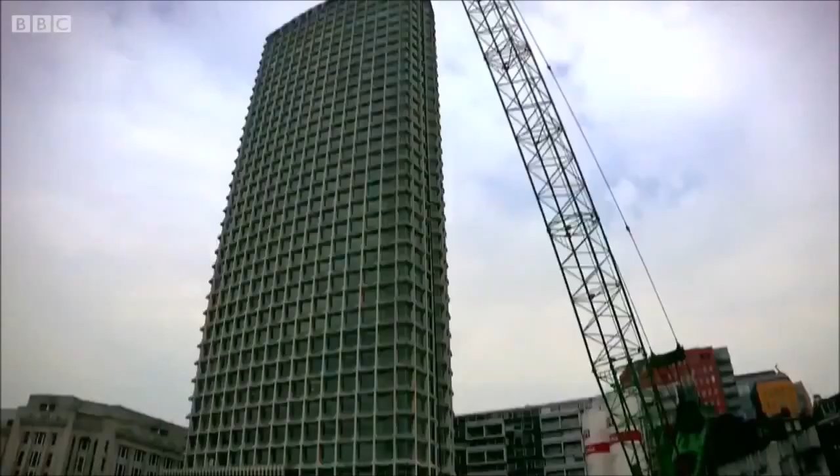Underneath the streets of London, an army of more than 10,000 workers is building the most ambitious railway in Britain for a generation: Crossrail.

Constructing Crossrail is like undertaking open heart surgery on a patient whilst that patient is awake. Costing almost £15 billion, constructing this 120-kilometre link is the biggest engineering project in Europe.

When we go through this gate, you'll see there's a very different world the other side of the fence. It's a strange, dark world. Not many people get to see it at this stage.

One of the greatest challenges: building 10 cavernous stations. It's a good place to put your worst enemy, isn't it?

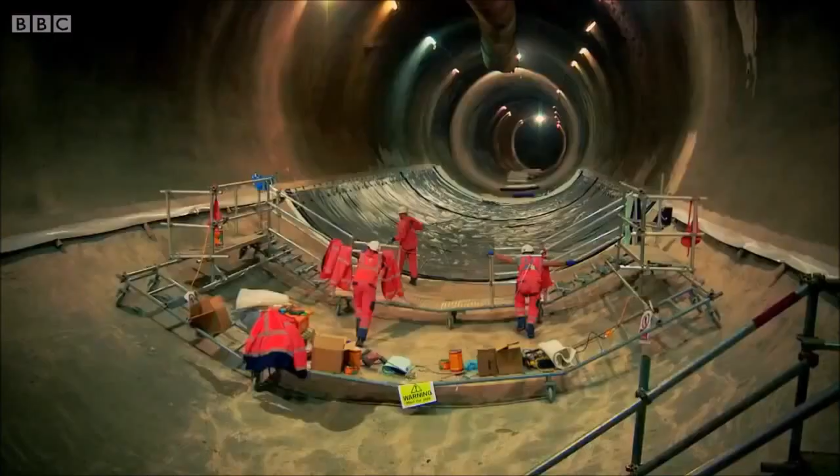It's difficult to appreciate the scale. Trains will carry 1,500 people. The station is designed to deal with 32,000 people at peak.

Working in the heart of the city, engineers are uncovering its past. We have come across some human remains within the shaft. It's a full skeleton at the minute.

And face a constant battle to keep London moving. This used to be a bowling green for the City of London. It was somewhat of an oasis beforehand in the middle of this area.

I plugged myself into my headphones to try and drown out some of the noise. This is the inside story of the epic endeavour to build London's new underground.

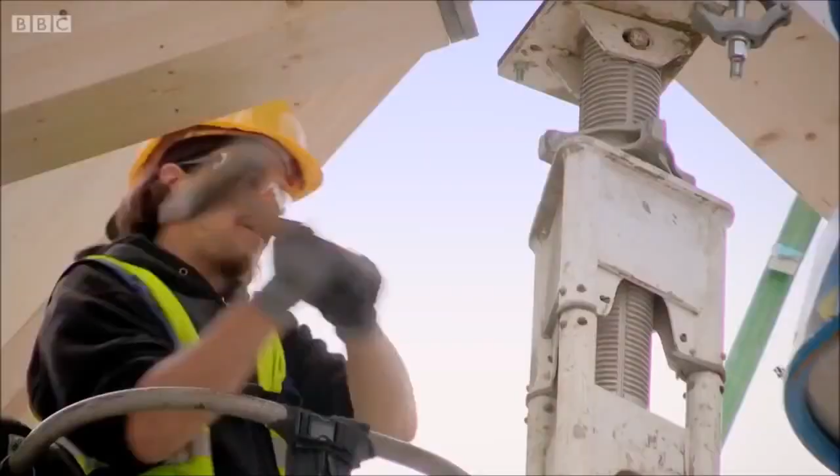London, Britain's business and financial heart. London has two banking districts: the historic Square Mile, and Canary Wharf, 5 kilometres to the east.

Crossrail's route will tie these hubs together, fueling economic growth. The new railway will pass right across London, cutting the commute from Heathrow Airport in the west into the city to 30 minutes. It will connect key mainline train stations with major shopping districts and the new city at Canary Wharf.

The 40 work sites needed to build this railway are bound to cause some disruption. I'm sure when it's up and running it'll be a marvellous thing, but I'm not sure full consideration has been given to the traffic.

It just makes more congestion, and it's the person in the cab that pays because they're sitting in traffic. London's a funny place, man. It can run smoothly and then it just gridlocks for no reason.

Crossrail's done a good share of that, good 60–70%. I'll probably never even use it. But Crossrail estimates that 200 million passengers a year will.

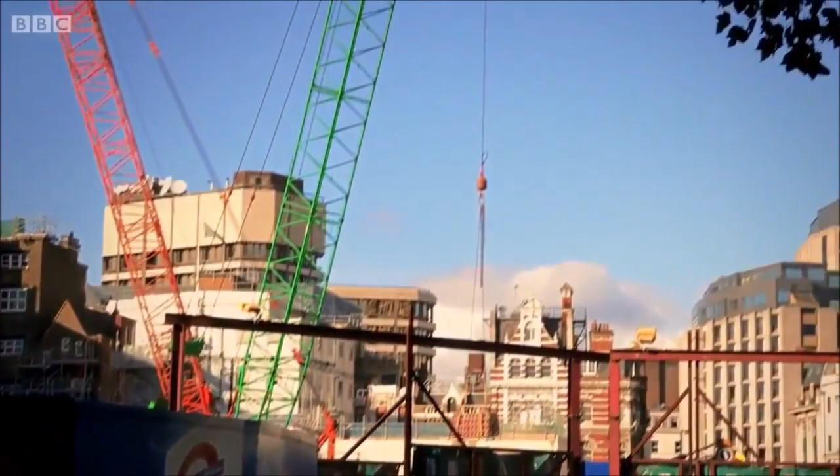One of the biggest tasks facing engineers is to construct the 10 new central stations. Canary Wharf will be the largest on the line. Leading a team of over 400 workers here is Michael Bryant.

What we're creating here is a passenger handling facility that will deal with between 5 and 10 people per second. I'm getting towards the end of my career now, and I can't really think of a better one to go out on than this, to be quite frank.

Employment here has quadrupled over the last decade. The new railway will help ease the pressure.

This is my third tour of duty, if you might say, at Canary Wharf. I was here on phase 1 when I did a lot of the early work on the logistics, and I was responsible for redesigning the DLR station and delivering that. And it really just instilled into me how important infrastructure and transport is to the future of development.

Canary Wharf station will be 250 metres long. And Michael's team is constructing it underwater, in a dock.

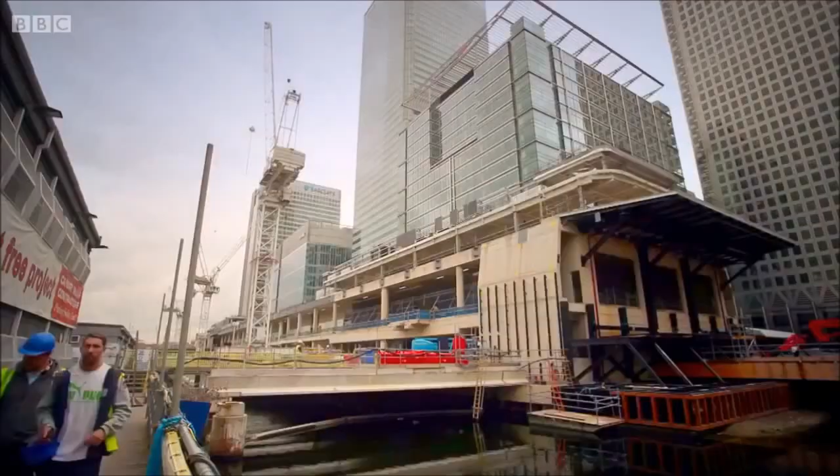They sank a vast watertight concrete box to form the station's walls. Concrete pillars anchor it into the dock bed. They drained out more than 40 Olympic swimming pools of water, then dug down to create 4 floors below water level and 2 floors above.

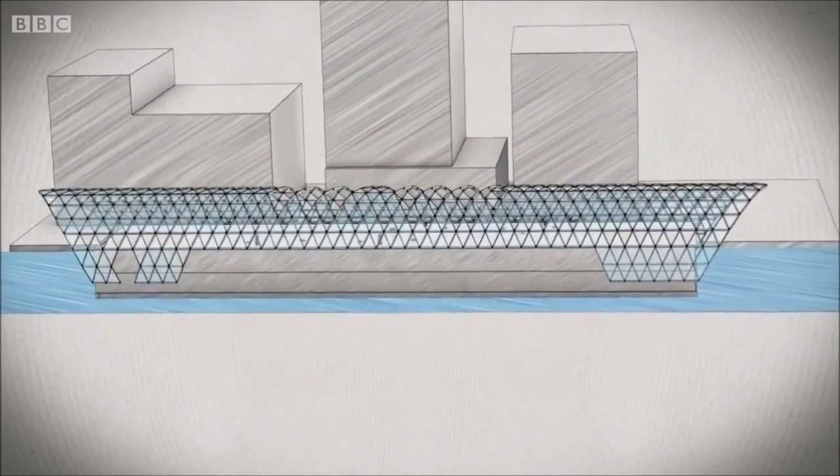Now the team face a series of challenges to transform this concrete box into a station. First, they must build the platforms, then install the escalators and ventilation system. Their toughest task: assemble its unique roof from 1,500 timber beams that will house a public garden open 24 hours a day.

The roof of this £500 million station has been designed by world-renowned architects Foster & Partners, famous for the city's Millennium Bridge and Gherkin.

Canary Wharf Group, who own this site, are investing £150 million to get the station they want. The brief to Foster, which was probably quite a brave way to go actually, was we want something that's totally different from everything else on the Canary Wharf. And I think we've got that, so they'll be very pleased.

The roof will be curving and arching up over like a curved apex. It'll be spectacular, like a giant conservatory or orangery. That's the feel that we've all been aiming for.

The 200-year-old West India docks were once thriving quaysides. These docks originally had the monopoly of handling ships and cargoes from the West Indies. Bananas for small boys, Saturday's picnic, or maybe the monkeys at the zoo. Fruit was offloaded here from the Canary Islands, giving the wharf its name.

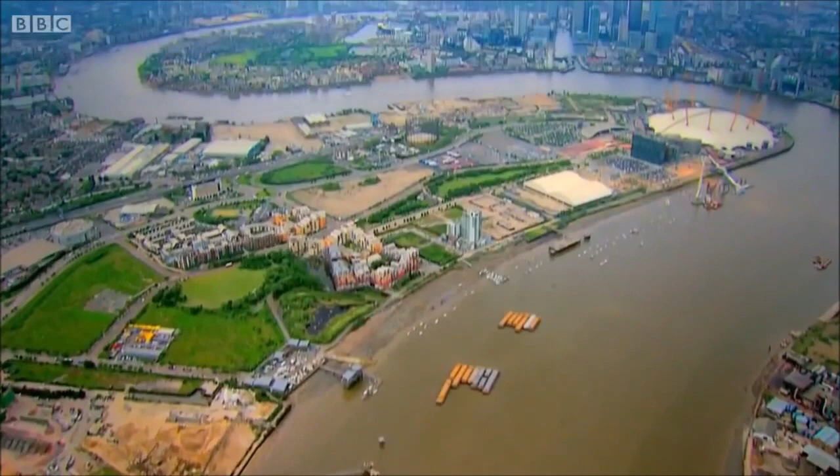But as ships grew in size and container ports took over, the docks fell into disuse. This vast area of land was reborn in the 1980s as the new home of the financial services industry. The site around Canary Wharf is still expanding fast today.

28 meters below water level lies the 21,000 cubic meter heart of this new structure. 4 years from now, 24 trains an hour will be pulling up at the platforms here. It's difficult to appreciate the scale of it. The trains will carry 1,500 people. The station is designed to deal with 32,000 people at peak.

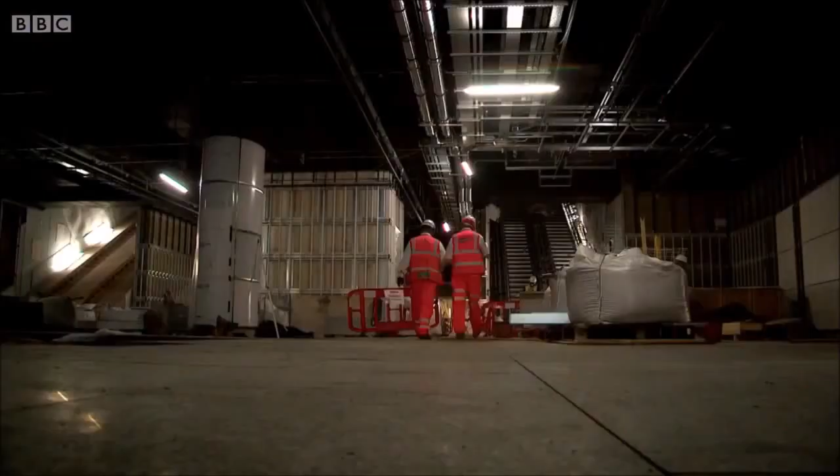And I've got to build a complete platform. That's my next objective.

Before Michael's team can start work on the platforms, they must shift 2 giant visitors. The machine you're standing next to is known as Elizabeth. She's a tunnel boring machine, 147 metres long, weighs about 1,000 tonnes. Whilst I'm very pleased to see Elizabeth here, and indeed her sister, who's over my left shoulder, called Victoria, I should be even more delighted when they've both gone, because what I want to do is get this space back to do my work.

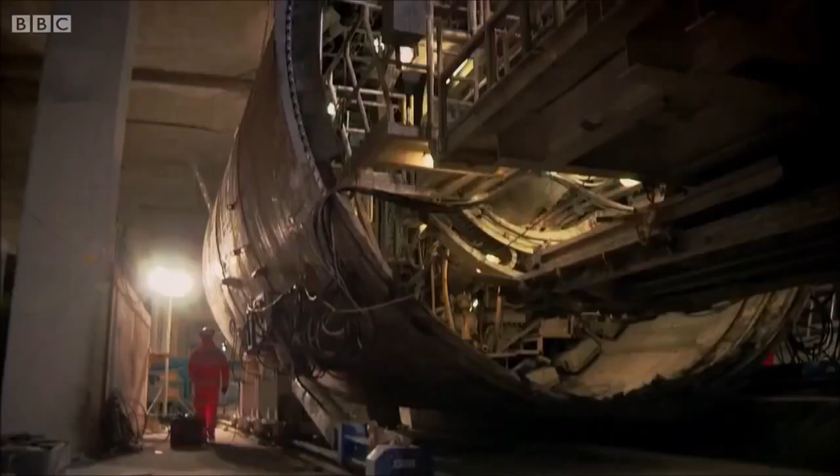The 2 massive digging machines have broken through into one end of Canary Wharf station. Now they need hauling through to the other end of the station box, so they can continue tunnelling towards central London.

Checking that their transit runs smoothly is second-generation tunneller Robert Birmingham. I'm one of many Birminghams underground, or have been underground, but my dad and my brother currently work on different sections of the project. The only reason why my brother and myself are in tunneling is because our fathers were.

These bad boys here is what I like to call God's roller skates. It's actually a lifting bracket that will lift the machine up using these jacks. There is then a propulsion ram at the back of the machine. There's no margin for error. As you can imagine, if one of these was to roll off these gantries, you're in a world of pain.

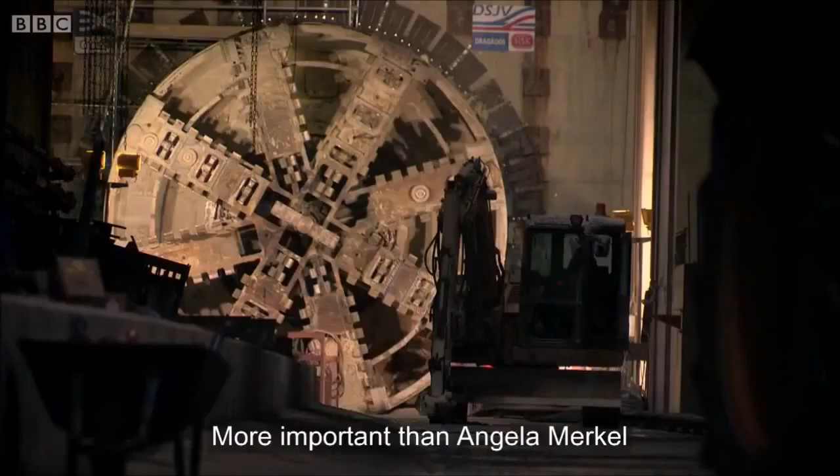In charge of driving the machine through the box. It's more important than Angela Merkel. I think so.

Yeah, it's one new system. Testing by doing. In the machine, it goes only this way. And when you drive too much, it falls down. That is a big problem.

Okay, boys, we're ready to go. Yeah. It's okay! Rock and roll. Yep.

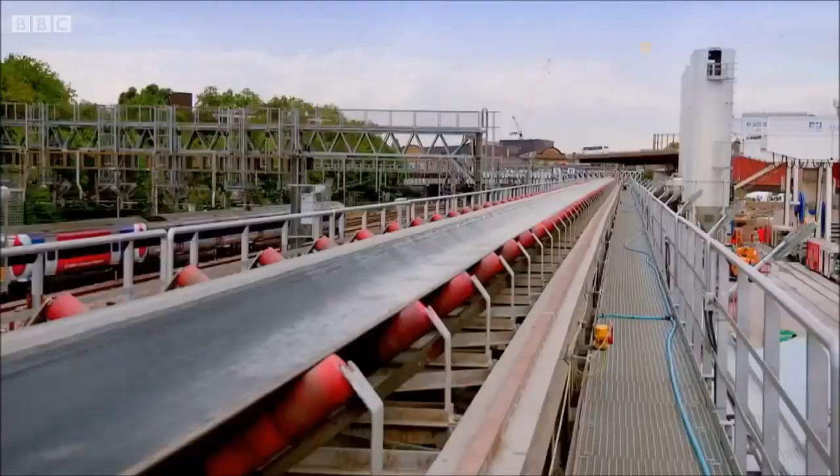As the jacks push the machine forward, the crew must extend the conveyor belt that runs out the rear. When digging, the 2-kilometre-long belt shuttles earth dug by the machine out of the tunnel. 4 meters.

We've come through the station here at Canary Wharf, and now we're breaking to the next section of tunnel, which will take us to Whitechapel, from Whitechapel to Liverpool Street, and from Liverpool Street we'll go on into Farringdon.

Three stops west, on the edge of London's historic Square Mile, engineers are already hard at work building a new £440 million station at Farringdon. Built from steel and stone, Farringdon Station will connect the Tube, Thameslink and Crossrail together. 150,000 people will use it every day, making it one of Britain's busiest stations.

Historic buildings surround this area. The Charterhouse is a Tudor mansion built on the site of a 14th century monastery. Engineers are digging deep shafts near these listed buildings to pump grout beneath the foundations to stop them sinking as they build Farringdon Station underneath.

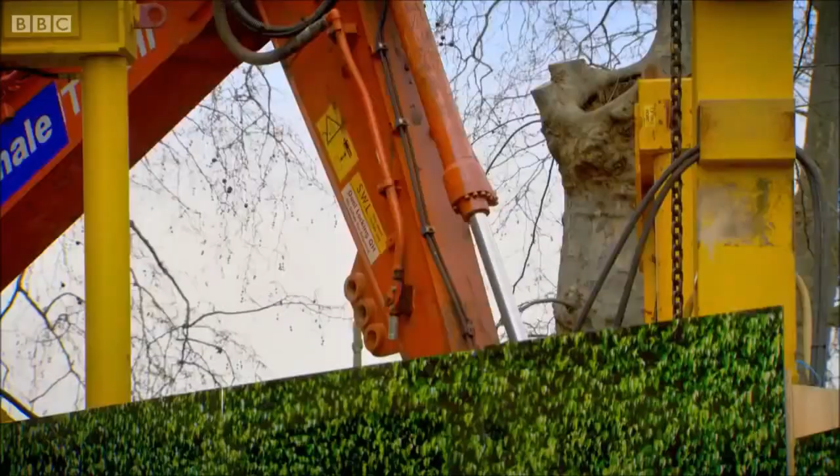The excavations have led to a grim discovery. We have come across some human remains within the shaft. We started off with a skull and then found a shoulder section, and it's a full skeleton at the minute. That's what we've uncovered so far. I saw part of a skull come up. So I got in, got my trowel out, had a look around, and I found one.

And then there were two more aligned east-west, which is what we'd expect from a medieval inhumation. We can only really tell that they're adult inhumations. In terms of what sex they are, it's very difficult to tell when you're digging them up. The skull is really fragile. It almost crumbles the second your trowel gets anywhere near it. Some sites have up to 22 extra weeks built into their schedule to accommodate archaeological investigations like this.

Crossrail's in-house archaeologist, Jay, has just 4 weeks before engineering work must resume here. It's exciting - this is one of the first times within this immediate area that we've actually found several skeletons together.

We know from historic maps and other historic records that within this area was one of the emergency burial grounds set out in the mid-14th century. But it's never been constructed on, it's never been built on, so it's very rare that there's an opportunity to really look at the archaeology of this site in detail.

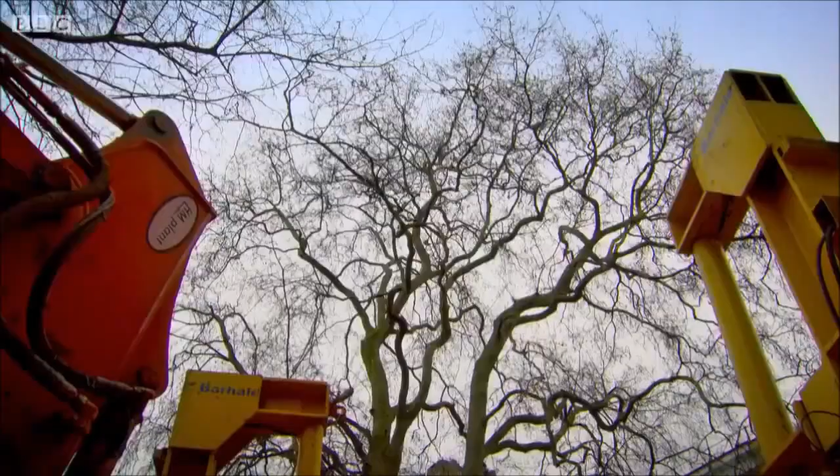Detailed forensic analysis will reveal if Jay and the team have found London's long-lost plague pit.

Three stops back east at Canary Wharf, construction work is beginning on the most complex part of Crossrail station here, its roof. This ambitious 1,000-ton canopy will be built from 1,500 timber beams, joined together using 860 steel connectors. The wooden frame will be covered by air-filled plastic cushions, enclosing the rooftop garden.

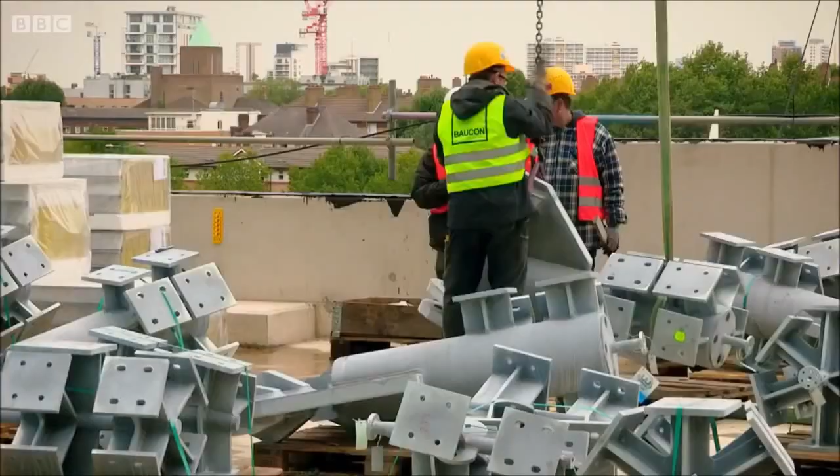Overseeing the German specialists who have 6 months to assemble this giant 3D jigsaw is Irishman Phil Duffy. One or two of our lads don't speak much English, so it helps a little bit to be able to speak a small bit.

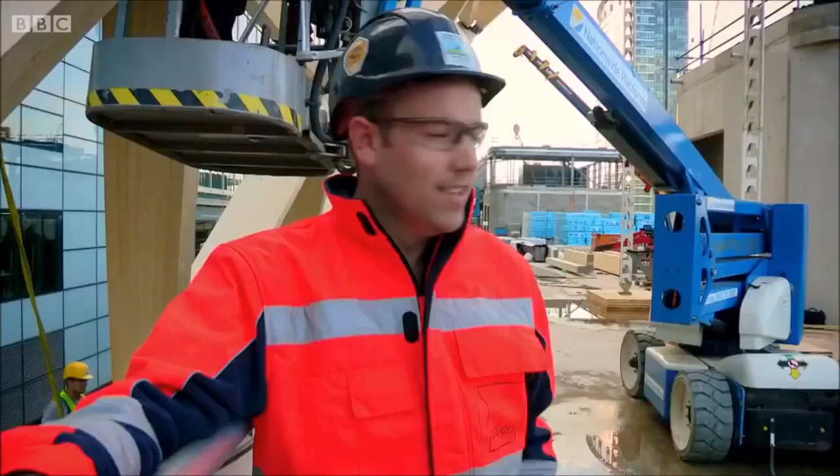Phil's not the only Duffy on the job. My dad's up fitting one of the timber beams at the moment. Slave driver, so I am. He gets the brunt of it. Yeah, he always had an interest in following in his footsteps, I suppose.

Phil's first milestone: assemble the roof's very first arch. If we don't have these in the exact right position, the timber elements won't fit.

Tiny bit down - everything has to be within the millimetre. This is like the keystone. The big crane will lift this in, and hopefully then it will slot into the exact right position. If this aligns up, the whole structure will follow through. So this will be one of the most critical lifts of the whole thing.

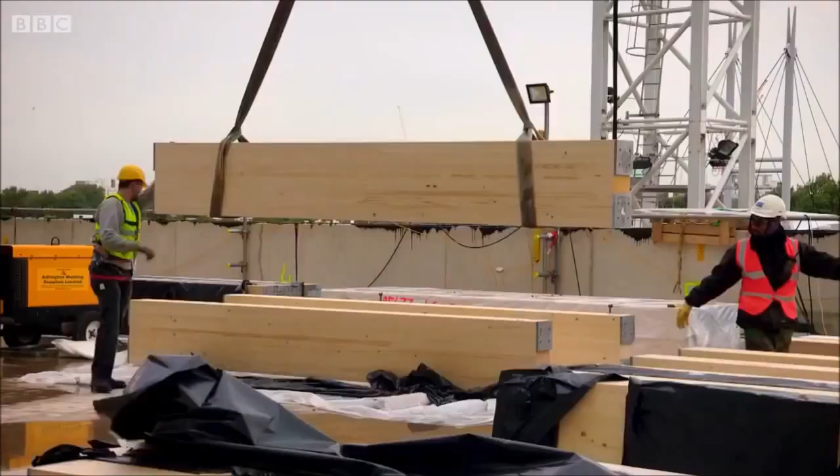Prefabricating a structure away from site and then assembling it as a kit saves time and money. It's a technique that's been used to startling effect in the past.

To house the Great Exhibition of 1851 in London's Hyde Park, engineers designed the Crystal Palace to be built this way. More than 1,000 cast iron beams and 300,000 sheets of glass were cut precisely to size in Birmingham, then transported to the site. The hall was big enough to house 6 cathedrals the size of St. Paul's, and it took just 7 months to erect.

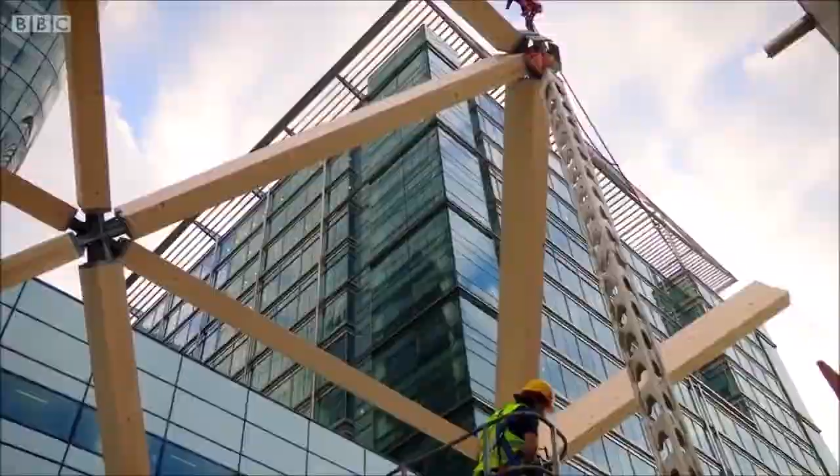Each batch of wooden beams for Canary Wharf station roof is prefabricated at this factory in Austria.

No, I'm not a timber geek, I'm just a regular guy. In charge is project manager Daniel Niebeler. I always wanted to build timber houses when I was a kid. So I started studying timber engineering and ended up as a project engineer for big-scale glulam projects in the UK.

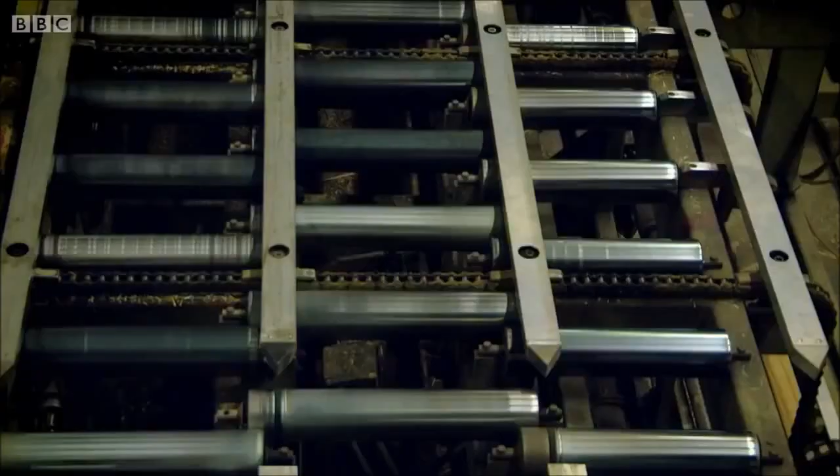Glulam is short for glue-laminated timber. The beams are formed of thousands of planks, glued together and cut to size. We get the spruce planks delivered from the sawmill and we put those into a kiln, and then we get dried down planks into our production line.

Workers scan each plank for imperfections that could create weak spots and remove those not up to scratch before gluing. Glue will be applied onto several planks, and then all the necessary planks required for one glulam beam will be put into a big press where they will be compressed till the resin has cured. It's immensely strong - the strength to weight ratio is bigger than with concrete.

Once dry, they cut and sand the beams down to size. This is actually already a proper glulam beam at the moment - it just has to be made good looking.

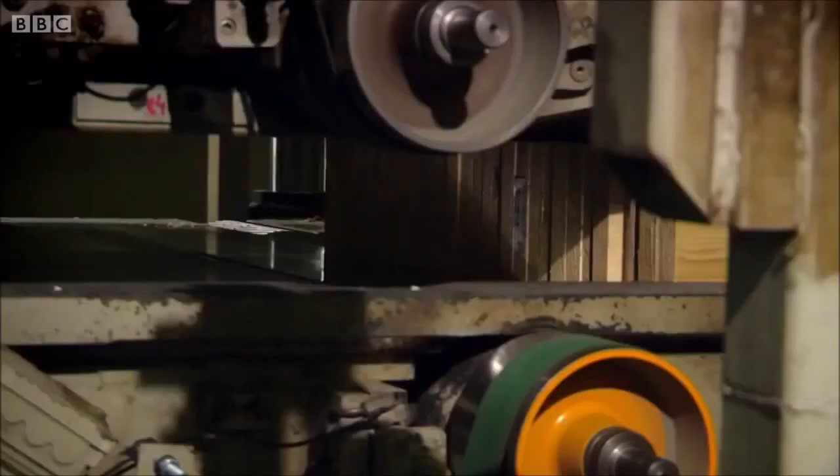Now the beams start to look really sexy. Oh yeah, we've got wood. Well, that's a top view of our Crossrail station roof. We could actually play Twister.

Applying those steel parts onto the timber beams is the final step. All that's left afterwards is wrapping them up and put them on the truck over to London.

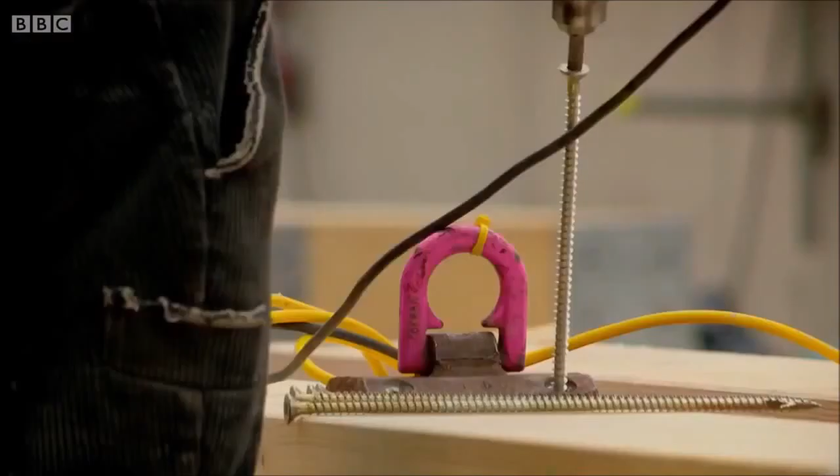You got a knife on that little Swiss thing of yours?

The roof's first arch needs a keystone, a 2-ton timber unit that will join the structure together. We're just about to put the centre section in place using the tower crane. We'll get everybody else out of the way and hopefully it'll go well.

As you slew round, mate, that should stay same orientation. Heads up, heads up.

Nice and steady, inches at a time, please, mate. Nice and steady, come down on your wire.

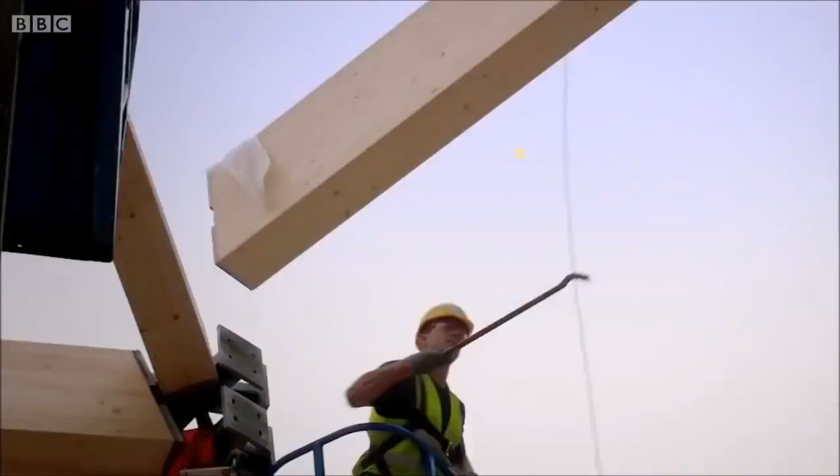The keystone is in position, but it's not a perfect fit. Just trying to locate the bolts on each corner. It's literally millimetres out. If we have an issue here with one of these timber structures, it exaggerates as you go along the building and our connections won't go in correctly. For alignment, they have to be perfect within maybe 5 mil.

Hit it properly, Robin. You can't beat the sledgehammer at the end of the day.

Yeah, that's it. Fairly chuffed, yeah.

Beautiful, beautiful. I like the way you work it. Oh yeah, I think I should have been a photographer.

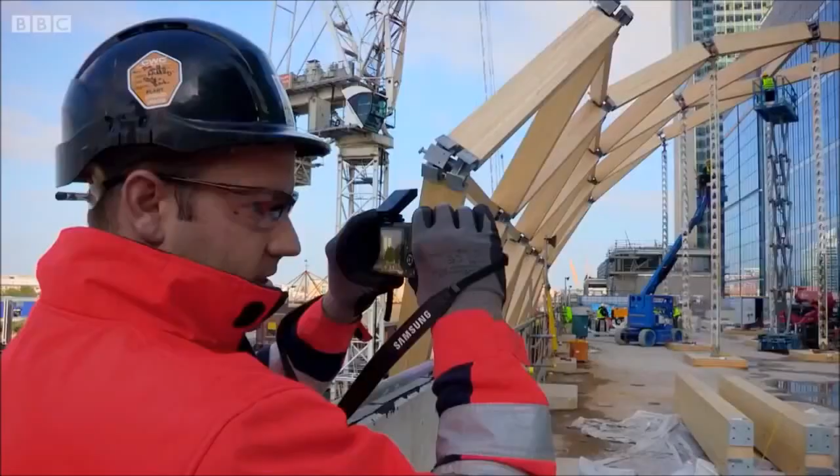What do you think? If you stand back and look at it, you can see the whole arch from one side to the other side now, which is perfect. This is a massive structure, and when it goes to plan, you can't be happier. Looking more than good, looking brilliant.

Okay. First milestone complete. 1,400 pieces of the jigsaw to go.

28 metres below dock level, Crossrail's tunnelling machines have left the station's giant box. Now contractors can get to work fitting it out. First they must build the 240-metre-long platforms. Then install the building's ventilation system and 9 escalators that will shuttle passengers down from the ticket hall to the platform level.

Heading up the team is construction manager James Goonan. I've never built a train station before, never mind one in a dock underwater.

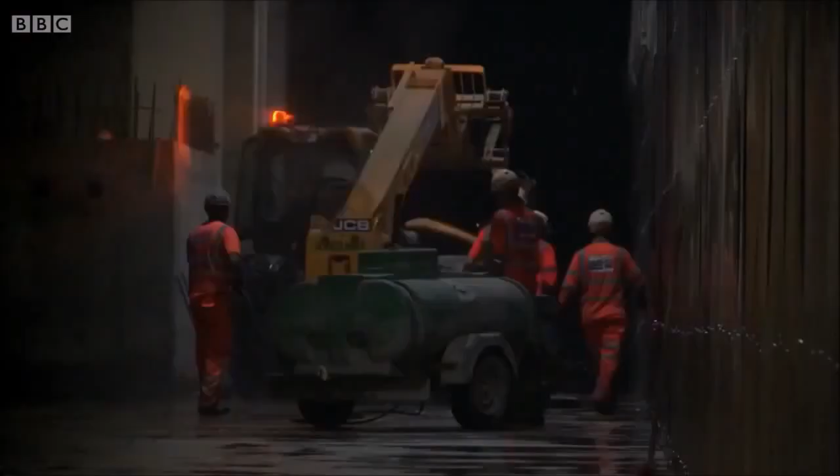One of the big issues is actually getting our materials down here. We've got what we call a mole hole, which is a hole up there which goes up to the surface level. Without full access to the mole hole, we can't carry out any works down at this level. There's no other way to get materials down other than the mole hole.

James must thread 580 precast concrete slabs down through this mole hole to the basement to assemble the platforms. It won't be easy. He's just following us with it. Where's he going?

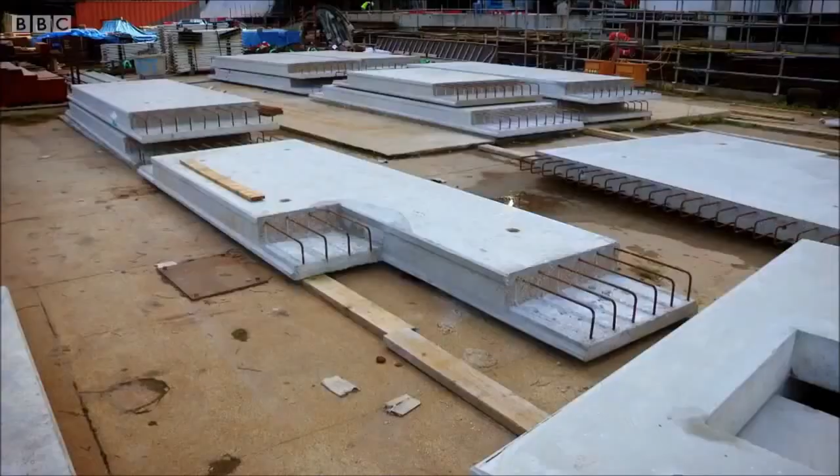So how many more panels you got to go in before the escalators? There's basically 150 left to go in from the east. Yeah, no, it's already looking good down there. It's taking shape.

Yeah, the precast is coming down as I am talking to you, Adam. The gantry crane's going 10 hours a day, 6 days a week, and it's the lifeblood of getting the platform built. All right, nice 4 please, Rocky.

James has just 6 weeks to get the platforms in place before the escalators arrive. The mole hole's the only way to get the escalators down due to the size and the weight of them. It'd be nice to have a bigger hole.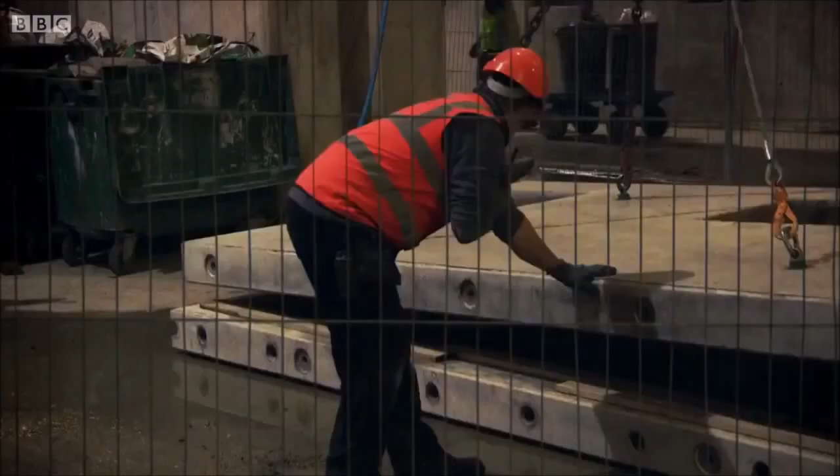Two stops west of Canary Wharf, engineers are constructing Crossrail's new station at Liverpool Street. The eastern ticket hall will sit 40 metres underground. It's one of many sites across London offering a portal into the city's past for Crossrail's lead archaeologist, J. Carver.

We're just outside the Roman and medieval city wall. The historical significance of this site is it is the site of the burial ground of St. Bethlehem Hospital, which from the 1600s through to about 1800 was located just nearby in Finsbury Circus.

Nicknamed Bedlam, Bethlehem Hospital had treated mental illness since the 13th century. Have you got any idea how many individuals we've taken out in this small hole so far? More than 50.

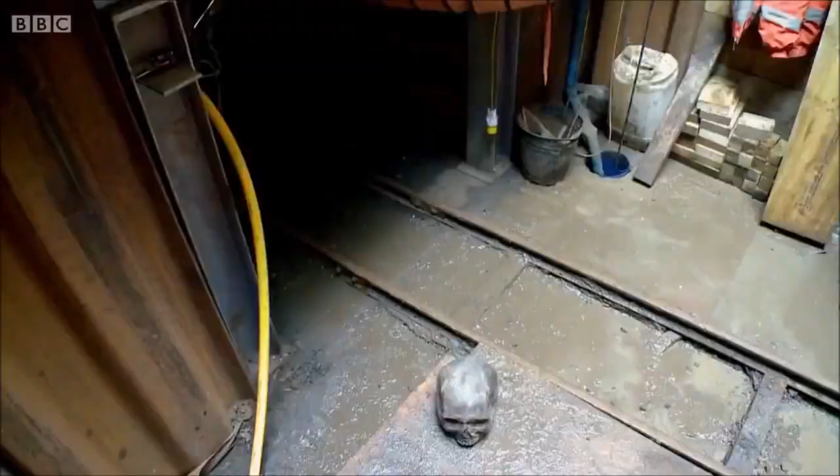Because the burial ground, being a post-medieval site, is very likely to be overlying earlier levels from the medieval and possibly even Roman periods as well. Digging deeper, the team uncover Roman skulls and pottery, washed down to this site by an ancient river, the Walbrook.

We've got very many sites coming up where we'll be doing this kind of investigations, so we'll be undertaking works all across the job for every Crossrail site.

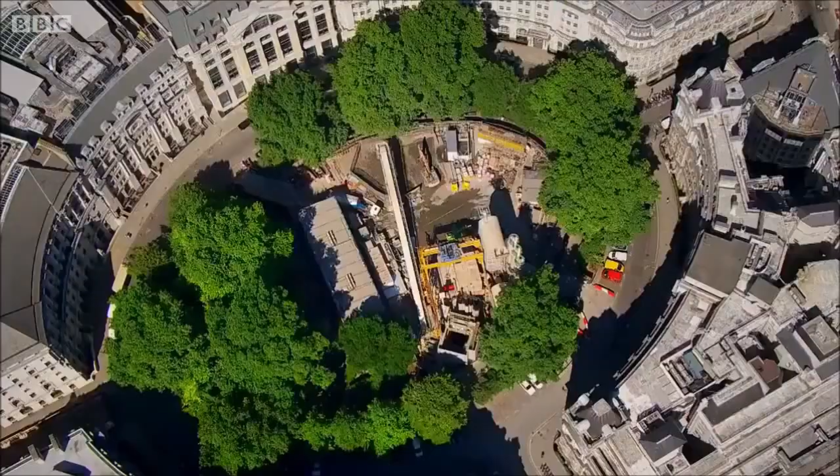Liverpool Street Station will be one of several new Crossrail stations serving London's traditional banking district. Space here is at a premium. To build the station, engineers had no option but to commandeer London's oldest park, dating back to 1606, Finsbury Circus.

They will need this area until 2018 for access down to the station worksite underground. A decision that's not proved popular with city workers. It's really detrimental. It has an adverse effect on environment, and because we enjoy coming here to eat here, people come to work, they want to have a healthy life. It was somewhat of an oasis beforehand in the middle of this area, but as you can hear, it's not really having that effect anymore.

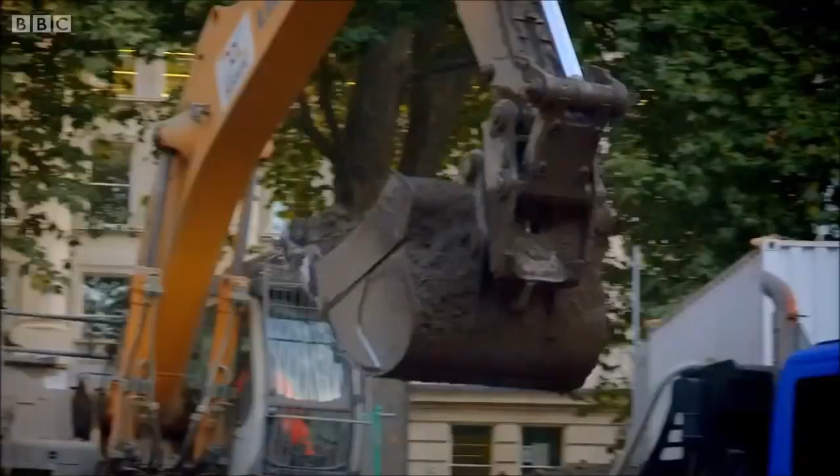It's annoying. It's only 5 years. In the grand scheme of things, it's not the end of the world, so.

Finsbury Circus is the subterranean gateway for construction manager Jules Boyd and his crew. This used to be a bowling green for the City of London, and we're going to put it back like that when we're finished. A lot of people have likened this to an anthill, where you've got a very small surface, sort of a lot of busyness, but underneath it's a whole network of tunnels.

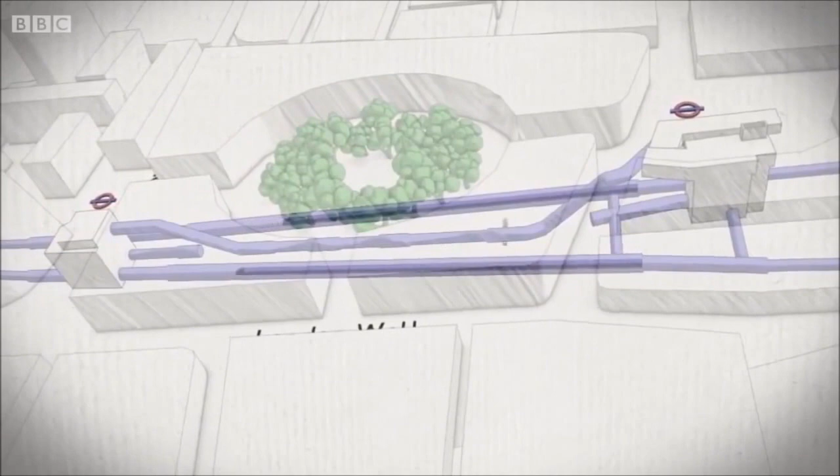Underneath the city, Crossrail is carving out ticket halls and walkways to create the new station. Longer than 2 football pitches, the platforms connect Moorgate Tube Station to the existing Liverpool Street Station in the east. Over a kilometre of winding passageways need burrowing out to link the platforms together.

It's a strange, dark world. Not many people get to see it at this stage here. A little bit more work to do to make it passenger friendly, I must admit. It will look very different from this, I assure you. So, and hopefully it will be quieter.

Jules's team use excavators to enlarge a pilot tunnel, creating vast underground spaces that will become the platforms. Once dug out, they spray the clay walls with special concrete, called shotcrete. It contains steel fibres that make it extra tough.

You can see the fibres here, which are the reinforcing thing. Don't put your hand on there, you'll get like a porcupine.

The spray gun fires the concrete out of the hose at over 100 metres per second, turning the steel fibres into bullets. You wouldn't want to be hit by it anyway. Steel fibres protruding from you.

Jules's second big city station build is one stop east at Whitechapel. I come down here quite often. You find all sorts of fruit and veg that you've never seen before. Most people walk along here and they see just the blue hoarding and then some strange buildings up here. And when we go through this gate, you'll see that it's a very different world the other side of the fence.

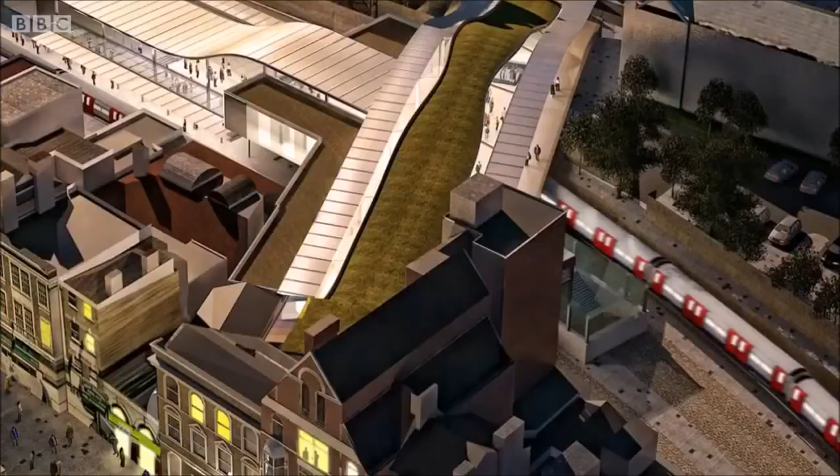Stretching out beneath the ground at Whitechapel will be 640 metres of platforms.

Today, Jules is preparing for a major milestone. The arrival of a tunnel boring machine that will break through into the station, connecting Whitechapel to the rest of the network. This is where the TBM is heading towards us right now.

This is the bit we have to have done. It has to be right. So there is not a chance of a big slab of shotcrete head wall falling into the tunnel or anything dramatic.

The end of Whitechapel's platform tunnel is rounded rather than flat. If the tunnelling machine breaks through this thin wall, it could damage the platform roof, causing up to 1 metre of cracking. To prevent this, the team has built a solid concrete plug.

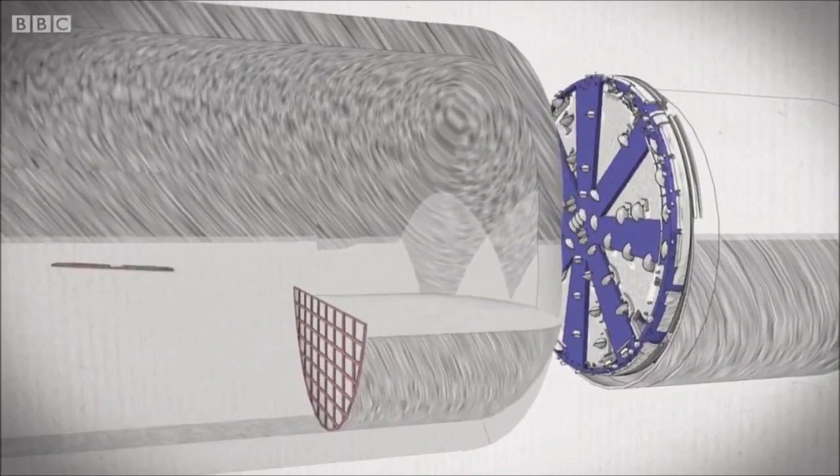This reinforces the station walls, but tougher than London clay may make the final drive into the platform harder going for the tunnellers.

It's quite exciting. It's actually coming to fruition now. And then we'll hit the wall.

There's communication so they can speak directly with the TBM driver from this tunnel. In the unlikely event that is coming through over here, we can say stop, for example.

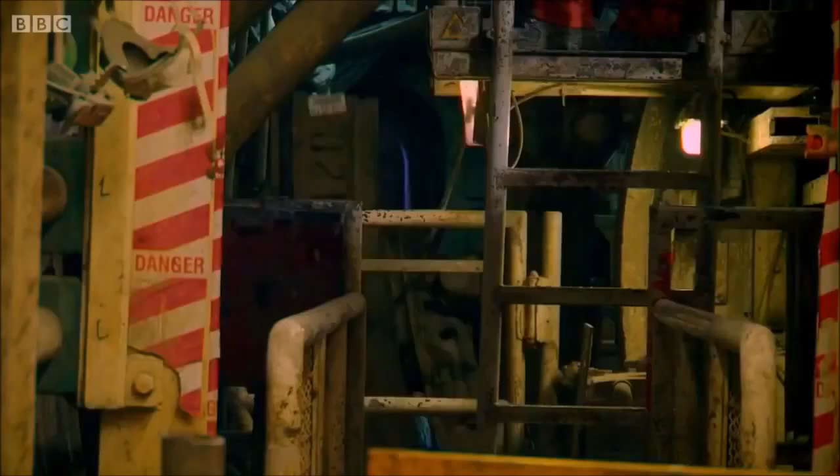On the other side of the wall, inside the tunnel boring machine, Dave Shepherd and Paul Haycroft drive the cutter head into the concrete plug.

You can go up to 30 on the head, it's not liking being in complete firm concrete. We've probably got about 4 metres plus of this material to cut through before we appear in the station.

The heat from cutting through the tough concrete is beginning to cause serious problems. The crew pump extra water into the cutter head to prevent overheating.

But this is creating a troublesome concrete soup. I see on the belt there's a lot of slop going up the TBM belt. So for all the modern technology, you'll see here that occasionally we have to resort to traditional hand methods.

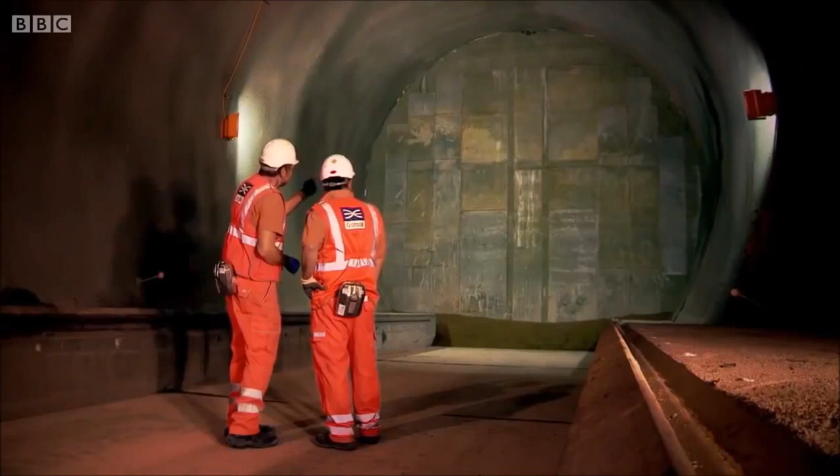That's always quite exciting. Everyone likes a TBM breakthrough, don't they? If it's in the right place. I think these guys back here, the surveyors, are looking a little bit nervous. Well, we should have had a little sweepstake before this. We could have all put our X's on. Like spinning the... spinning the dog or spot the ball.

I swear the noise is coming from the right-hand side rather than in the middle. But...

We can't stand much more of this heat that the concrete's generating. While the tunnelling machine battles the heat, all Jules and his team can do is wait.

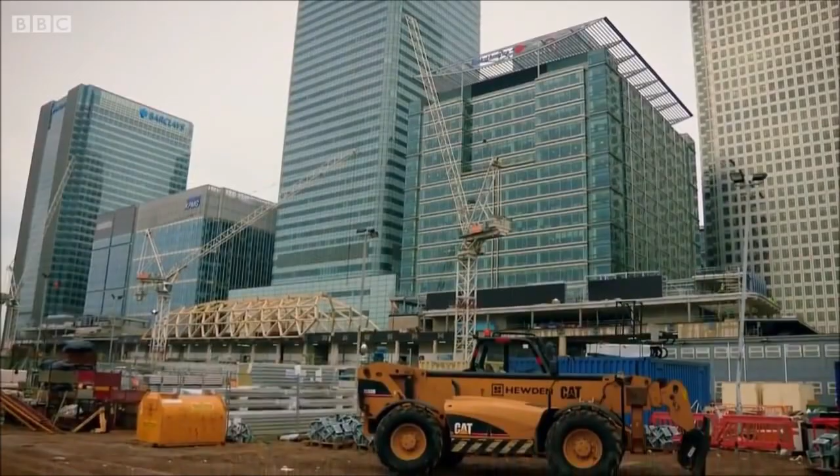One stop back east at Canary Wharf, the new station's roof is slowly taking shape. When complete, the entire building will be longer than its neighbour, 1 Canada Square, laid on its side.

The sheer scale of the station creates unique problems for its engineers. During the daytime, as the sun heats the building, it will try to expand, and at night it will try to contract. If the building was a single structure, the movements at the ends would be so large that it would actually try to tear itself to pieces. So we've split it into 3 sections, meaning they can move relative to each other without causing problems. They are kind of alive, yeah, it's quite a living, breathing thing.

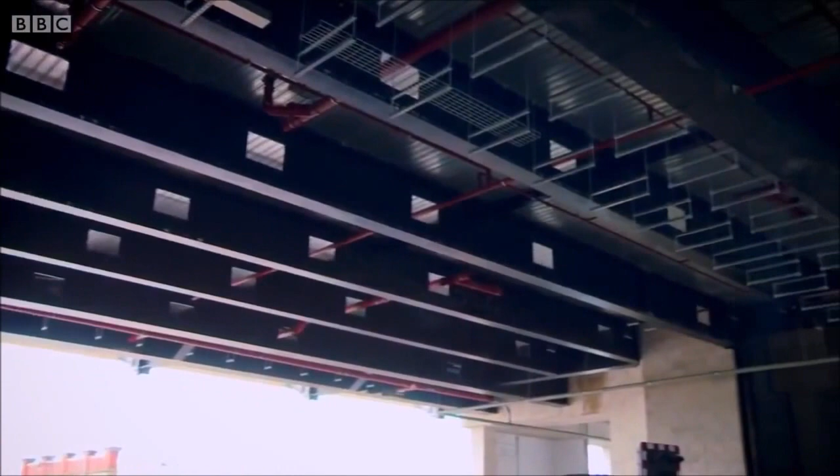Most of the station is built from reinforced concrete, except for this stretch at the east end of the structure, which is made from steel and passes over a road. The steelwork also needs to take the weight of the gardens above, which causes problems. It still behaves very differently to concrete. It could be a problem - something that has to be allowed for in the design of the roof, because otherwise the roof isn't going to behave as it's designed.

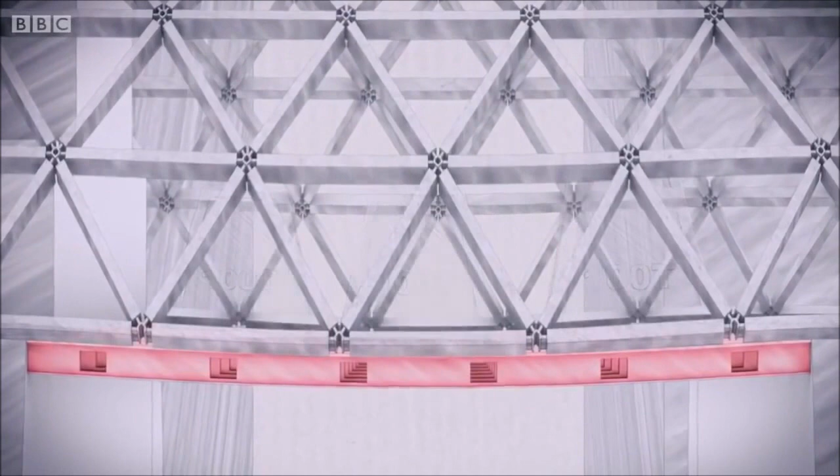This steel section will be more flexible than the concrete either side. If the team built the roof across the steel then added the soil and trees afterwards, the extra weight could cause the steel to sag, pulling the timber roof down. So before they build across this section, they must pre-stress it, loading it with 300 tons to simulate the weight of the gardens. Only then can they build the roof. When they remove the weight, the steel will temporarily spring back up until they landscape this area, which will push the steel back down, leaving the roofline perfectly level.

We needed 300 tons. That's quite a lot of weight to add, but it needed to be done in a way that we could take it off easily afterwards. So we came up with the idea of using paddling pools, and it looked kind of cool having a load of swimming pools on top of the roof. It went on in August, so it looked quite inviting at the time. Now it's November, it's not quite so nice. You can see the water here, it's quite manky.

Now the steelwork is preloaded with the swimming pools, it's safe to build the roof on top of it. You're now pretty certain that that will fit in with all the glulam you've got?

With the pools in place, Phil's crew can continue piecing together the roof across the steel section of the station. We have 5 mil tolerance there with it. I'll adjust it and then you come back and resurvey it. Okay, make sure it's all right.

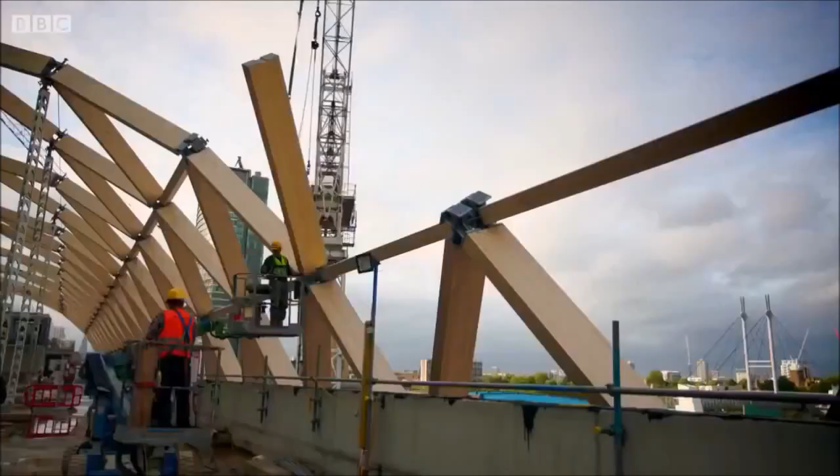With another 200 pieces of the jigsaw locked together, they can pull the plug on the pools. The floor is going to lift very slightly, and it's going to take the roof up with it. Then when we add the park landscape on later, it will push it back down, and the roof won't have any extra stress in it.

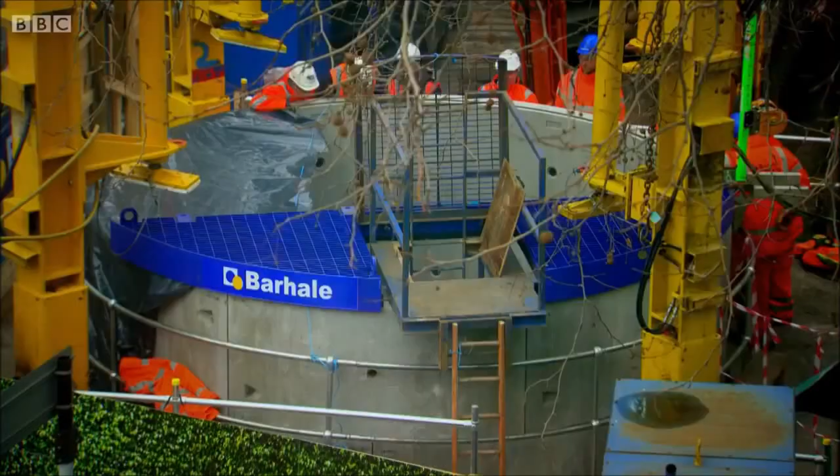At the new Farringdon station site, Jay Carver's team of archaeologists have uncovered 25 skeletons. They think this was the site of an emergency burial ground for victims of the Black Death, and are waiting for confirmation that they found London's long-lost plague pit.

This burial ground has long been referenced in historical documents. For 600 years it's been talked about, but it's never been found. We're hoping to find out some crucial questions about the skeletons we found - precisely what date they are, and can they be linked to the 14th century outbreak of Black Death?

Jay sent the skeletons to bone expert Don Walker for forensic analysis. So this is one of our individuals from Charterhouse Square. Yeah, this is one of the ones we've been working on, one of the 25. You'll see nothing on the skeleton of a Black Death victim that reflects that disease. Right, so we have to look much closer, microscopic. Yes, so what we do is sample the teeth - they're a microbacterial time capsule. The plague's DNA becomes trapped in the roots.

We sent off a tooth to have a look. They sequenced the DNA and compared it to various diseases, including Yersinia pestis, the plague, and they found some matches. It's pretty incontrovertible, really, that that's what we're looking at. The evidence seems to fit with that, certainly. The chances are, if they were exposed to it, they probably developed symptoms and probably died. We can't be absolutely sure, but we know they were exposed to it.

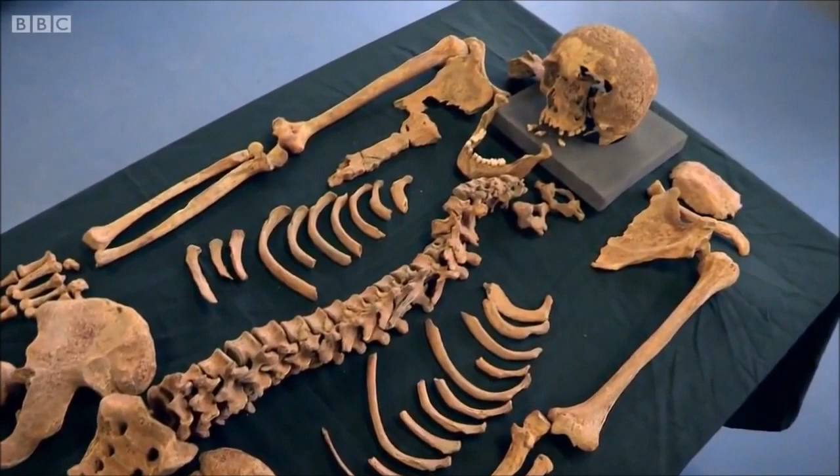This individual was probable male. We also want to look at the age, to see at what age they died. Once you're grown, it's to do with wear and tear - things we would look at would be the joint surfaces. We think this person probably died between the age of 26 and 35.

We have been doing research to look at things like strontium, carbon and nitrogen, not only to see where they may have come from, but what their diet may have been. What we found is there seems to be a mixture of people who were born in London and people who were born elsewhere. London was a mixture of people born there and people who migrated in, like today. By the 14th century, there was massive trade and exchange all over Europe and further afield. The Black Death made its way by those processes. We've got a huge amount to write up and publish now.

Jay and the archaeologists have cracked the mystery of the Farringdon bodies. We finally found evidence for this emergency burial ground, set out in 1348, more than 600 years ago. We've got an incredibly clear picture now of these individuals and how they ended up in Charterhouse Square, and I think it's a highly significant find.

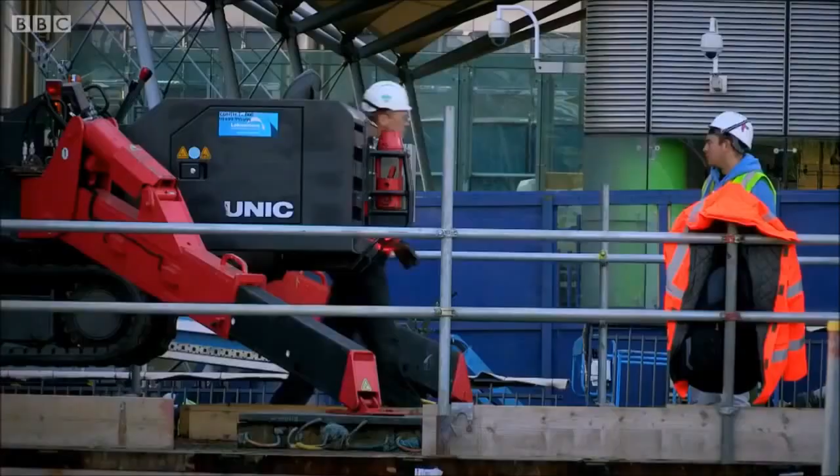Three stops east, back at the new Canary Wharf station, with the platforms almost complete, workers are installing the ventilation system. The western elevation has 3 gaping holes, behind which 3 fans will sit. Bespoke stainless steel covers will hide this backroom machinery from view. The job of installing them falls to snappy dresser Neil Dutton.

Yeah, I've got this bit of a thing about shirts. I get them custom made. What can I say? I've got a big neck and a little body. I'm probably the best dressed construction guy on site.

We have been employed to clad the whole external section of this with a stainless steel surround, to get to a finished product on the outside, making it look sexy and pretty.

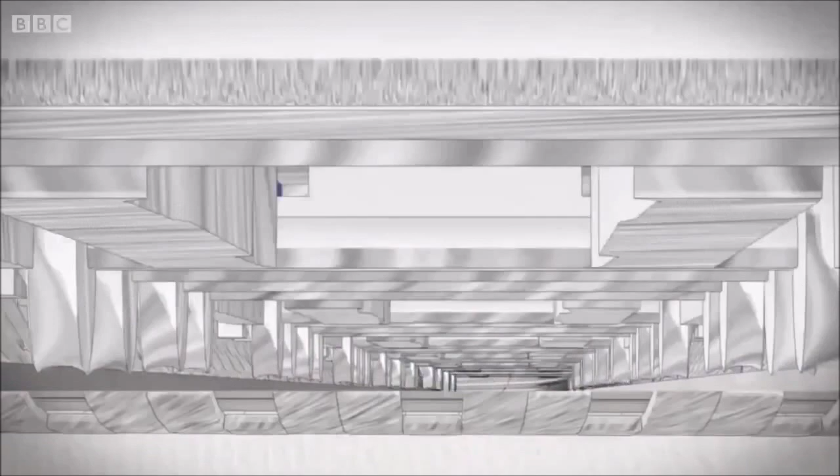The station's ventilation system is critical to its operation. Crossrail is spending £26 million on platform edge doors to separate passengers from trains and stop litter being sucked onto the tracks. But the doors cause a problem: a train rushing through a tunnel creates an almost perfect seal, forcing air in front of it. As trains pull into Canary Wharf station, pressure will build and needs releasing to avoid damaging the platform doors. So a network of ventilation shafts not only draws away brake heat, but also allows the air to escape. 3 giant fans at each end of the platform will help pull the excess air out to surface level. This should relieve the pressure and protect the platforms as trains arrive.

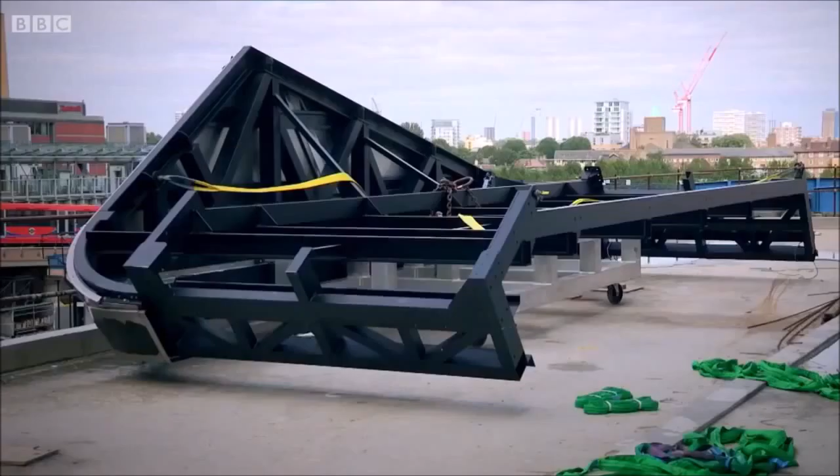Neil's team must crane the vent covers down from the roof, then winch them up into position.

Okay, and we're not going to leave any rough edges on this, are we? I don't want any damage or any scratches to that thing. That's the only thing - no, they cost quite a lot of money. I think each frame, with the stainless steel, is probably 75,000 a piece. So we've never done anything like this before, it's new to us.

Gentlemen, this is a very important lift today. I don't care about time, I care about precision and safety. So let's just make sure we do this right. Before we do, I need signatures on the back of this, please. The crew must sign up to confirm they understand the lift plan. Have you got anyone taller than you? There's nothing better than seeing you bent over.

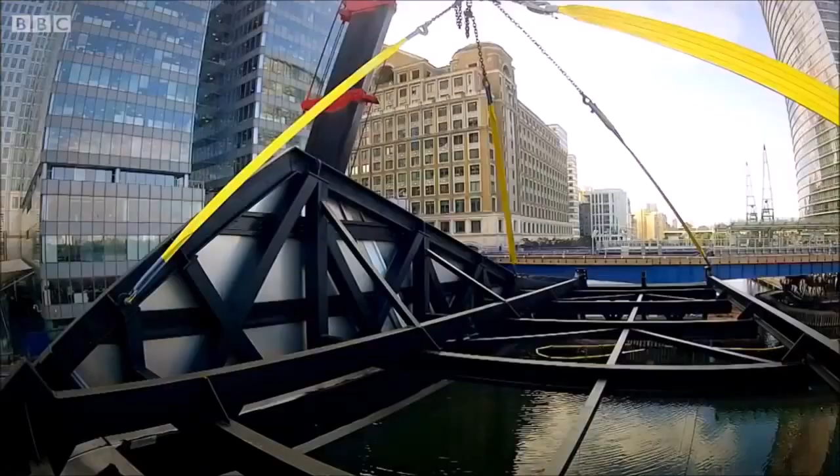Yeah, we're good. This is absolutely awesome. Guys, we need to get hold of those lines. Whoa, whoa, whoa, whoa. There was a little tight spot there, as you saw - that was the most concerning part. That's it, pull his ass end in over there.

We're good, that's the easy part. With the first covers down, they can hoist them into position. A winch, pulley and crane hold the steel in place.

We see them as six halves - they're actually 3 units, but they're 6 halves. It does look quite spectacular. When you actually see them all completed, it's going to be quite iconic when people are actually walking by.

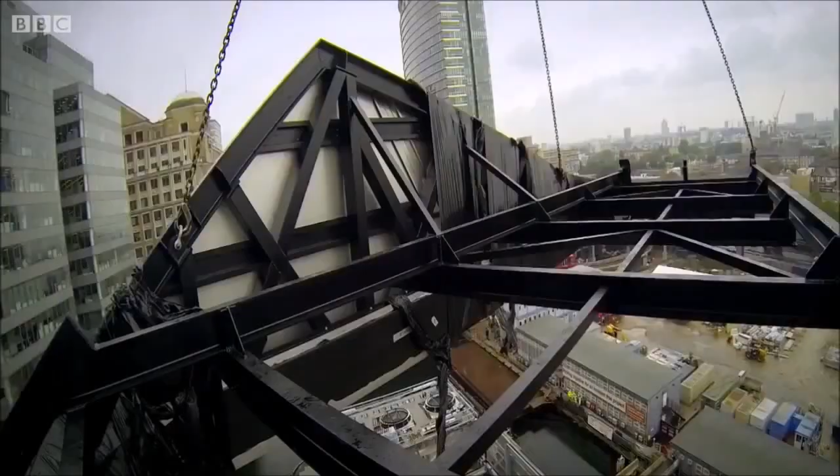Get down to that. The gap to squeeze in the final vent cover is tight. Right, when that thing's in there, it's going to look bang on, you know?

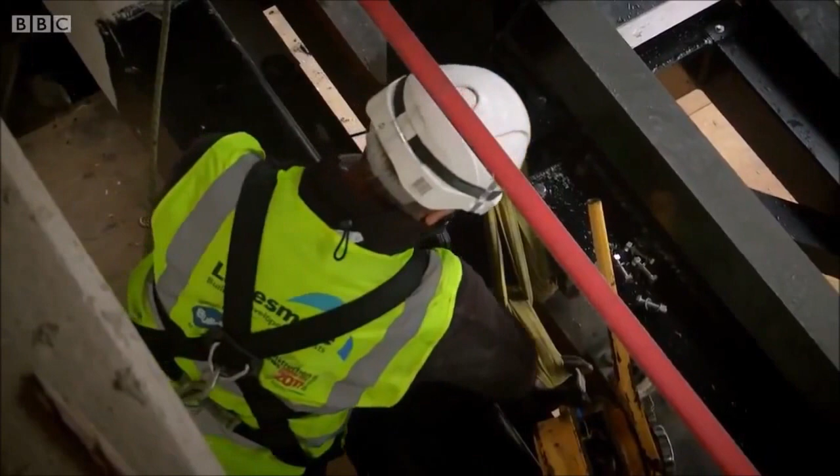Disaster already - Milo, you never checked it, did you? The holes in the bottom drilled too small, didn't they? Ken, what's going on, Jack? You need a jack? Yeah. Why, it's got to be lifted? The bolt holes for the last section don't line up - it's actually just out of alignment. Every time you deal with steel or any sort of raw material, there's movement. They need some muscle to force it into position. This is the first time it's happened on the job, it's not happened with any of the other ones. That's construction, it happens.

The team tighten their nuts, securing the final vent cover into place.

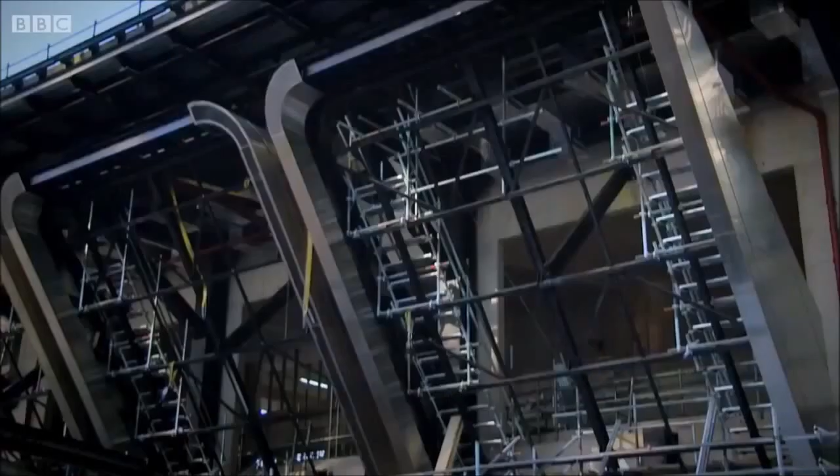This is stainless steel in its absolute perfection. Absolutely awesome. And it's just got such sexy lines to it. I mean, every building's got to have the sexy lines, and that stainless steel definitely got some sexy lines.

With the station's platforms assembled, the first escalators arrive for installation. The escalators are one of the key operational components of the station. They're mission critical, if you like. I think of this station as a people processing facility. People need to get in it, through it and safely out of it.

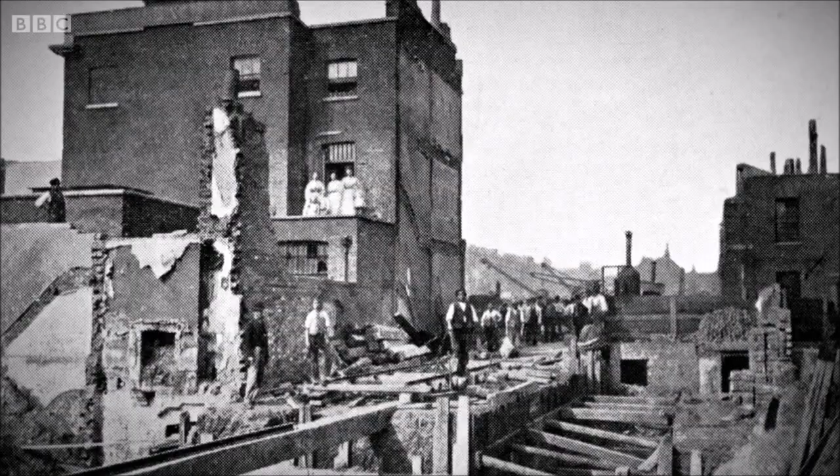London's first subterranean railways ran just a few steps down beneath the ground. But as tube lines were dug deeper, engineers needed fast ways to shuttle people down to the platforms. Filing people in and out of elevators proved too slow. One of the earliest solutions, a spiral escalator, installed at Holloway Road Tube Station in 1906. The first underground escalators, as we know them today, didn't arrive until 1911.

9 escalators will take passengers down from Canary Wharf's ticket hall to platform level. Squeezing these machines down to the basement through James's mole hole will be a challenge. They come down on a gantry crane, so there's 4 lifts. The smallest ones are just under 2.1 tonne. The biggest lift is 6.5 tonne. Then the 4 sections get bolted together.

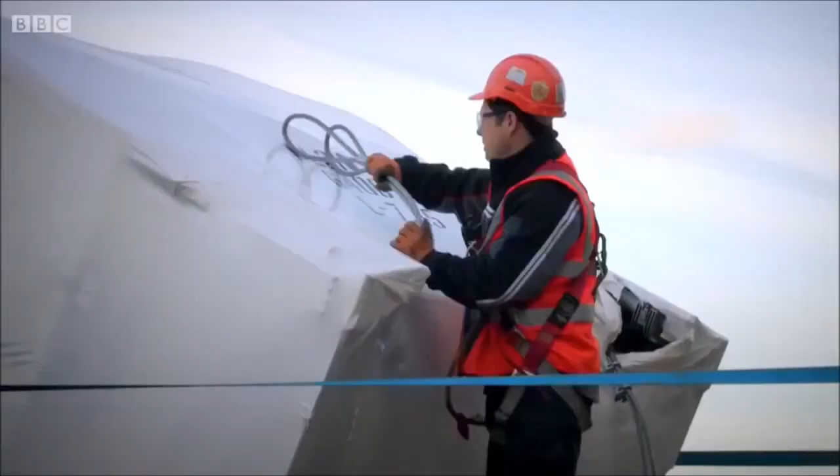It's a tight fit. I think the larger piece that's going to come down this afternoon is about 7 metres long. The mole hole itself is about 5 metres. That's the biggest section, this one, on this one here. It's just getting them down now through the tight headroom that's the crucial thing.

If we damage them, we have to pay for them. That's why we have to always have a look before they come off the lorries. No one in the yard, is there? Go round, Kev.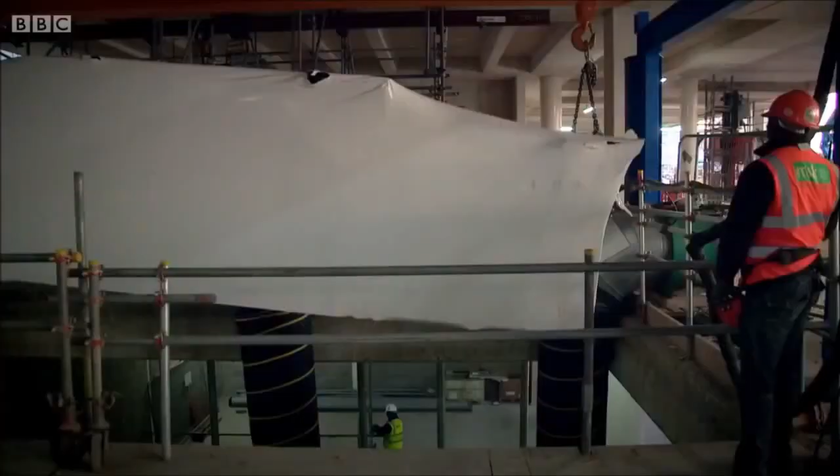Right, down slowly. Fingers and toes. You have to tilt it. It's very tight, it's 50-50. But we'll get it and we'll go for it. Ready? Down on each point, please. No problem. Coming down now, coming down.

It's a steady descent through the station's 4 floors.

Come down with your right hand voice. Nice and slow. We've just got to tip this now to come through the hole. Yeah? Yeah, it's tight. One side through, one side ain't. We don't want to hit the sled because it'll dent the escalator, so.

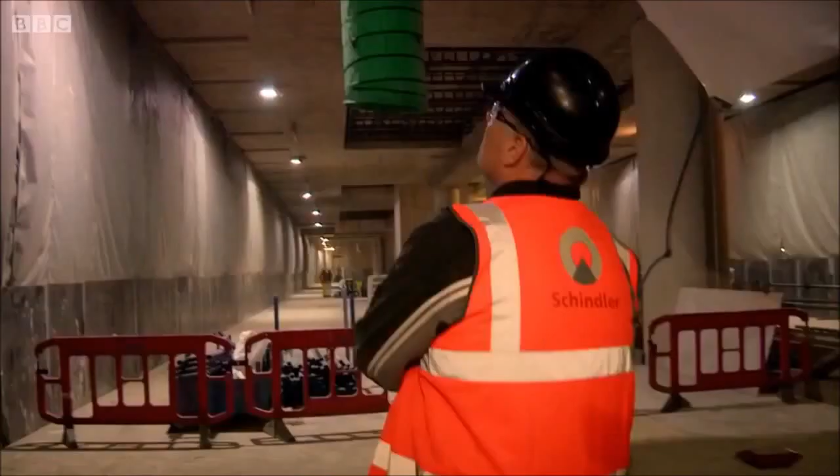Just wait for the swing just to stop. Oh, that'll do. It's through there now. That'll do, yeah. Whoa, whoa, whoa, whoa. It's tight, but we knew it was always going to be tight. Yeah, go on. With the biggest section down, the other pieces are child's play.

Right, down slowly. All the 4 sections are down, ready to start unwrapping them and joining some sections together. I'm happy, I'll sleep tonight.

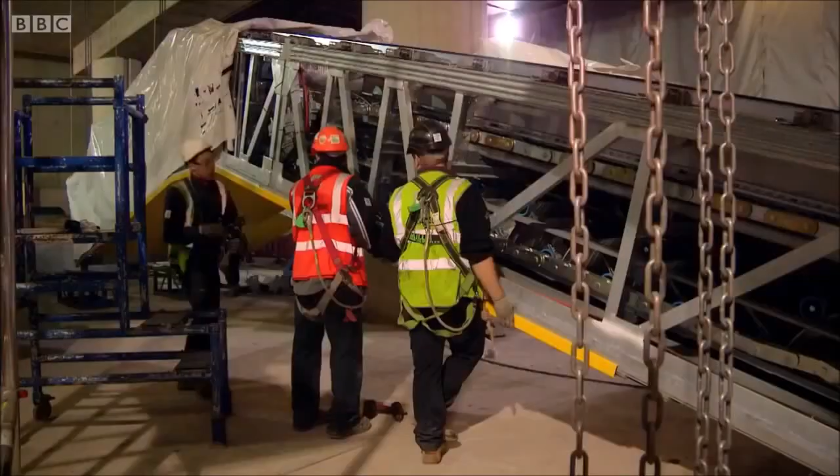Last task, join the escalator sections together. I love riveting, this is a very riveting job. And raise them into position. Go, muscles, you getting it? Need a man. No. Love it, up you go.

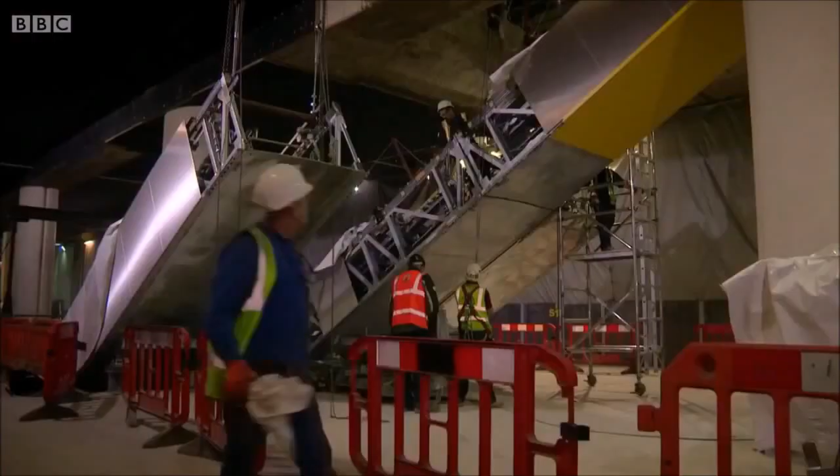Two notches up again. That's it.

What we're seeing here is the first real link between the platform and the ticket hall, the conduits, the umbilical cord if you like, that runs through the station, linking all the spaces. 4 years from now, these escalators will be some of the busiest on the network, carrying up to 100,000 people a day down to the trains.

Two and a half miles east, at the new Whitechapel station, Jules's team has waited 3 years for the tunnelling machine to break through into their platform. This will finally connect the station into the 120-kilometre Crossrail network.

It's quite exciting, it's actually coming to fruition now. So quite a select few get to witness it. Oh, I got my lovely camera here. I'm expecting to take a lot of pictures, and maybe some personal ones for the family, to hopefully be proud as I am.

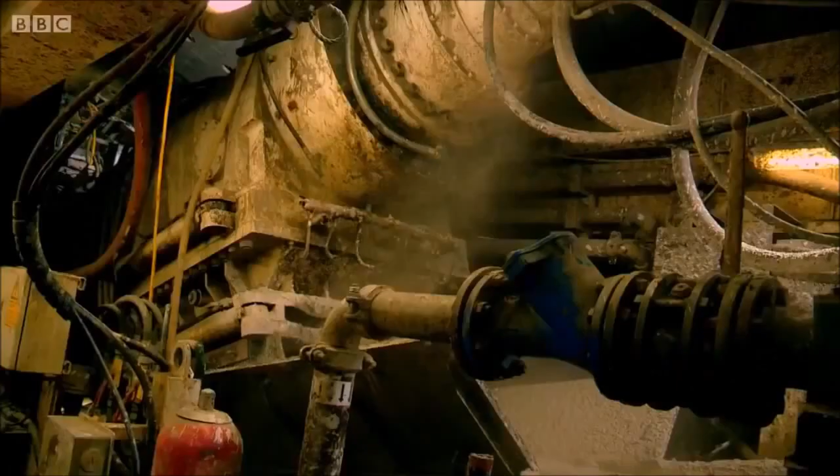The tunnelling machine has made it 3.5 metres through the concrete plug. During the course of the next thrust forward of the TBM, we should be showing signs of breaking through the head wall at Whitechapel. So that's 900 mil in theory to the breakthrough, is that correct? Yeah, approximately. Although the wall might actually collapse before that. It should do actually, yeah, Roger.

I'm with the TBM driver. Could you tell us what you can see, please? Two big cracks and steam coming out. The wall hasn't collapsed then yet, no?

Oh, there we go. First bit of muck fell off the face then, and it was on the left-hand crack. And another bit. Any minute now, that slab of foam concrete is going to fall off and show the face of the TBM, I hope.

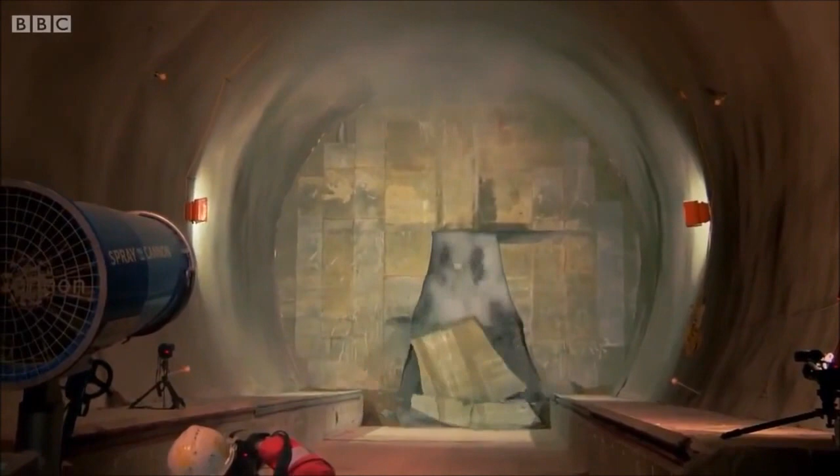There it goes. It looks like dust, but it's mainly steam that's coming in. This is more of a breakthrough for radio, isn't it, than television? Can you see the full cutterhead yet? You can't see anything. I haven't seen anything yet, all I've seen is dust.

One final push, and the machine pulls into Whitechapel. See the guys, the TBM crew coming through there now, which is nice. It's sort of a welcome to Whitechapel moment. Probably see the view through to some of the team on the Whitechapel side. Dust has settled now a bit, so there you are. You can see Whitechapel.

After 3 years of working towards the same goal, the tunnellers finally meet the station builders. Congratulations, and well done. No problem, spot on. There was a lot of heat generating in the machine and a lot of steam from the other side there. So you could feel that from your end? The heat was intense inside, yeah.

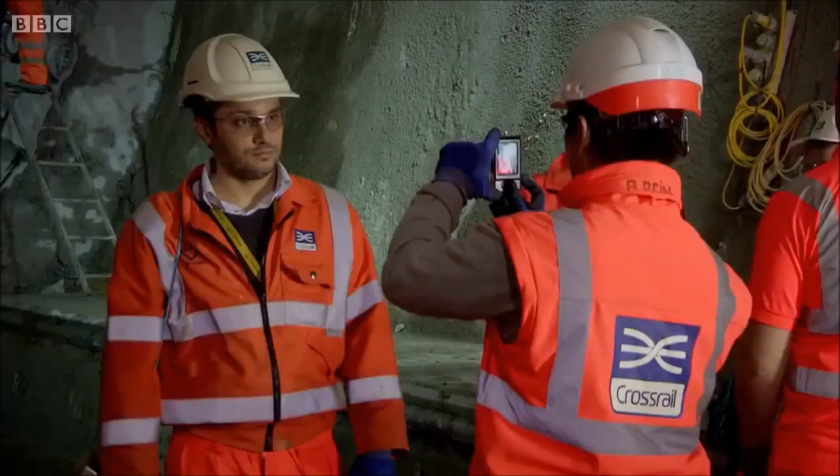It's fairly surreal, all right, to be standing out in front of what you've stood behind for so long. But the foam concrete did its job well there. The machine cut its way out of the ground, into the station, rather than barged in with large boulders falling. Should be a photographer, shouldn't I? You're the legend. Now I can show my mom. 1, 2, 3.

Whitechapel Station is finally connected to Crossrail's tunnels. In 4 years' time, at rush hour, 32,000 people will pass down the platforms here.

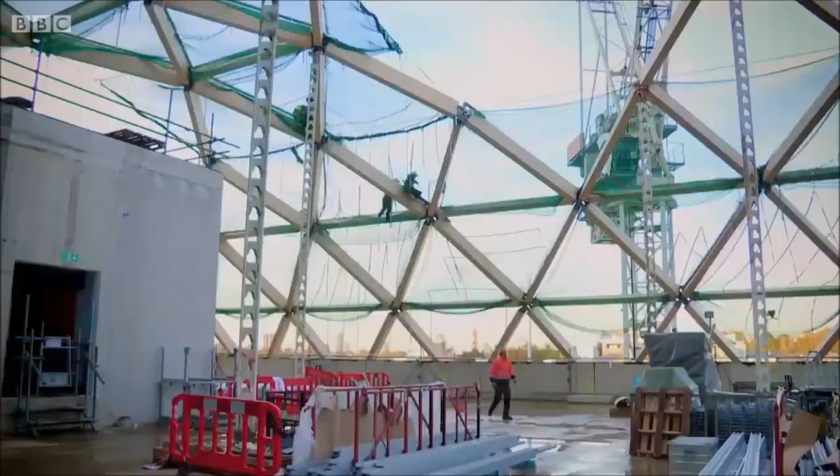At Crossrail's Canary Wharf station, Phil's team is locking the last beams into place. Everything's going perfect, thank God. Everything is good. It's the biggest project that we've done. It's something to be proud of, I suppose.

Final piece of the jigsaw: 780 inflatable cushions that will fill the gaps and cover most of the rooftop garden. In charge of this part of the build is Roy Butcher and Christoph Schmidt.

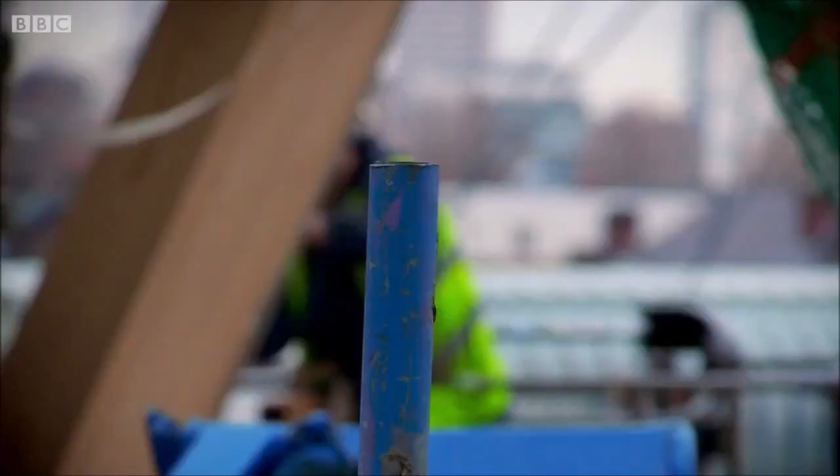Well, look good. Very good. Is it straight? Okay. He loves to hit me. I love to hit him. That's what we call teamwork. Teamwork, yeah.

Installing the cushions requires a head for heights, so they've assembled a crew of highly trained specialists from all over the world: Romanians, Hungarians, Germans, Dutch, English.

Who's English? You? I'm Welsh. Ah, you're Welsh. Oh, yeah, I'm sorry. Cut.

They're rock climbers and mountain climbers, so they're used to heights, and yes, a very skilled trade. Basically, they're just unwrapping the cushion now. It comes all folded up, they unfold it. They have to put aluminium sections which run down the edge, then connect it into the system, connect the air pipes, and blow it up. Sounds simple, a little bit more difficult.

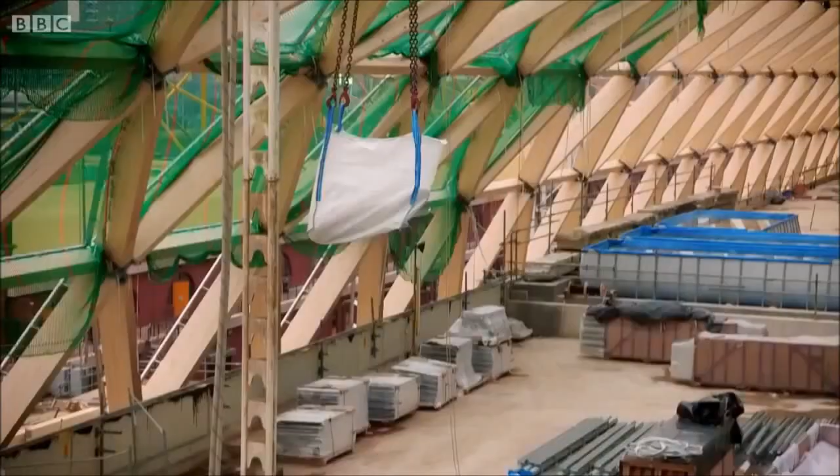Fitting the first cushion on the lower outside edge will be a real test. Below is a 20-metre drop. Because we're installing the cushion almost on the vertical face, there is no area for a safety net. This is the most susceptible point of the installation, when it's opened. If the wind catches it, that's the worst case scenario. Once it's got the rails on it and it's attached, it's secure.

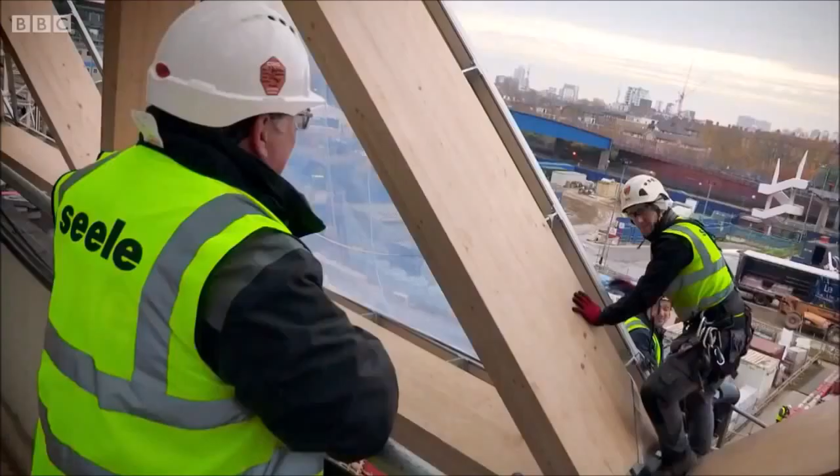We're now fitting the air inlet, so any moment now we'll see the cushion inflating. It is actually starting to inflate now. One done, about 750 to go. I'm a happy bunny. It's growing, you know. It's getting more beautiful every day.

40 metres below the roof, James's 240-metre-long platforms are almost fitted out. It's an immensely satisfying project to walk away from this. It's probably a once-in-a-lifetime opportunity to work on something like this.

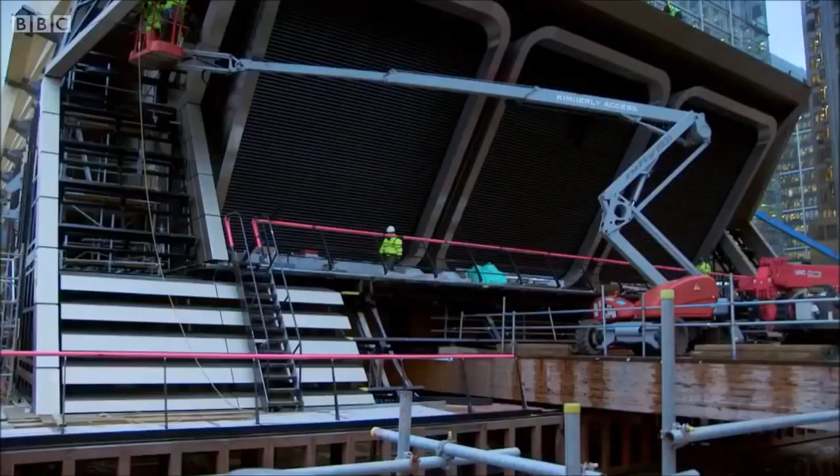Brushed steel louvers add the finishing touches to Neil's vents. It might look fancy, but the amount of engineering that's gone into this is outstanding. I would say the whole team's proud. And the final timber slots into place on the roof. All our timbers are fitted. Everything is done now. So that's the problem now, I'm out of here. Back to Ireland.

4 years from now, and the ticket halls open. The escalators start running. Before then, the team must lay the tracks and build the trains. London's population is set to pass 9 million in 2018. Only then will the architects of this £15 billion railway discover if Crossrail is enough to keep London moving.